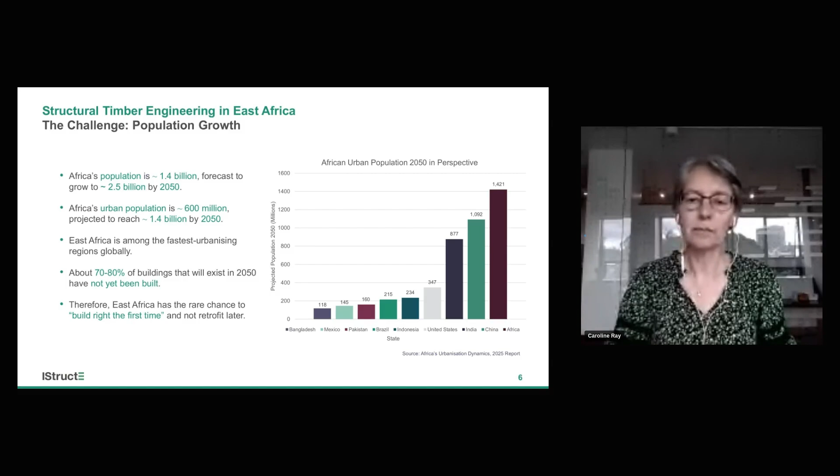We have this incredible need for new buildings, particularly new buildings in the housing sector. There was a study we did a few years ago that was looking at the rate of supply of units in the housing sector at the moment, just in Kenya. And the rate needs to more than treble in order to meet the housing demand. We currently have a deficit of more than 2 million units and require more than 12 million units just in housing within Kenya in the next coming years.

We also, alongside the housing, have need for other social infrastructure, for schools, for healthcare facilities, for basic places to work, for our industrialization that's coming. And so the opportunity that we have is huge.

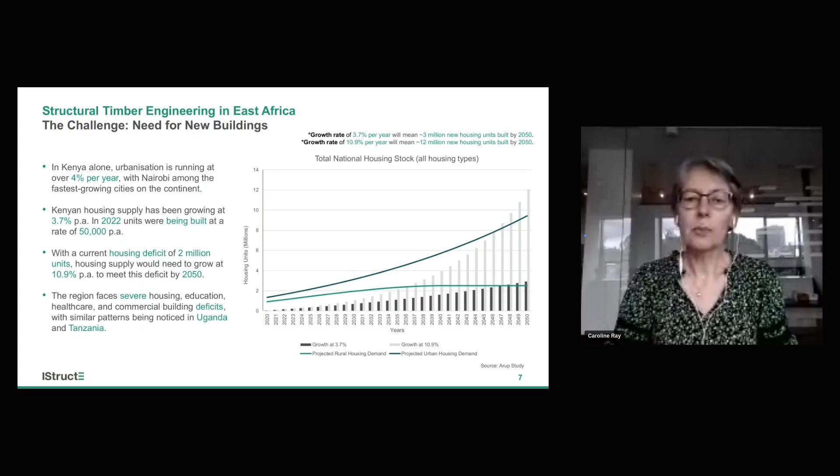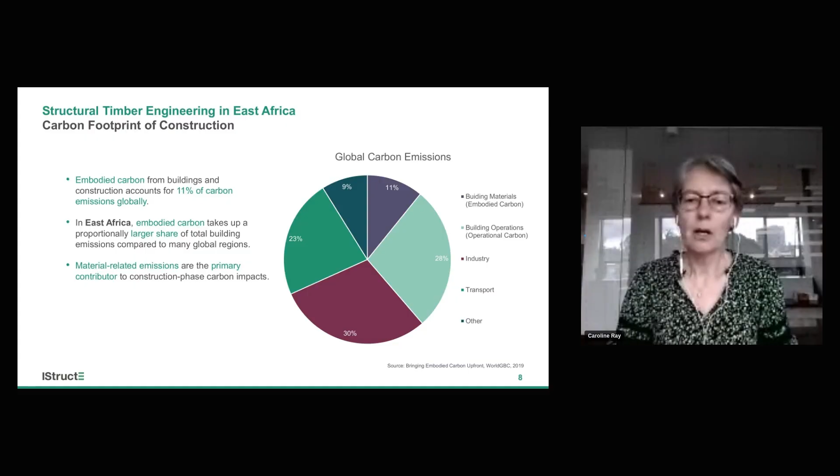We all understand the figures to do with the carbon footprint of construction. Globally, embodied carbon represents about 11% of carbon emissions. But in East Africa, the embodied carbon component of our building's footprint is proportionately higher than it would be in the Global North. We generally don't have heating in our buildings, and in many climates we can cope with natural ventilation, so our operational carbon footprint is proportionally less than our embodied carbon footprint.

This means our material choices for all new construction are fundamental to the overall carbon footprint of our built environment. In Kenya, that disproportionate amount of carbon from our construction sector is very visible—it's currently about a third of our overall emissions. We have a very green energy grid, which helps in other sectors, but it means our embodied carbon, and how we manufacture and process materials and bring them to site, is a disproportionately larger part of our national carbon footprint.

That creates a massive opportunity for us as structural engineers to look at how to do things differently.

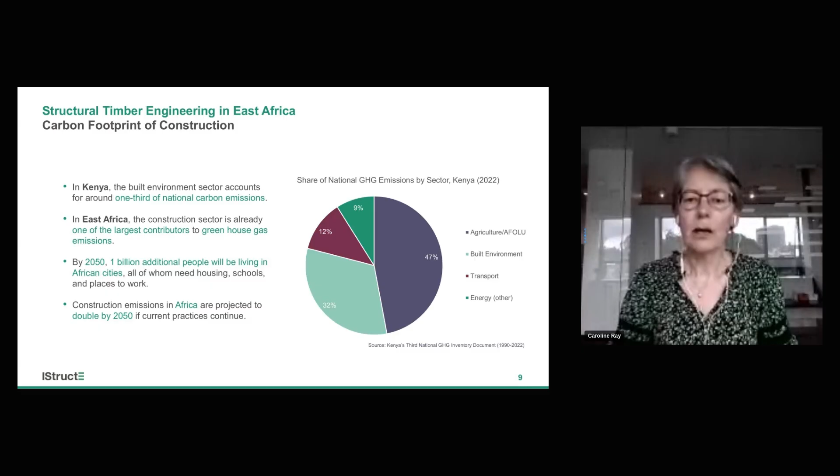So realistically, is timber an alternative? Are they realistic alternatives? Well, we think they are, but we need to look at the tensions in this transition away from the traditional materials, through the modern materials, and into bio-based construction being used in a more technical way, perhaps for higher-rise, denser urban developments.

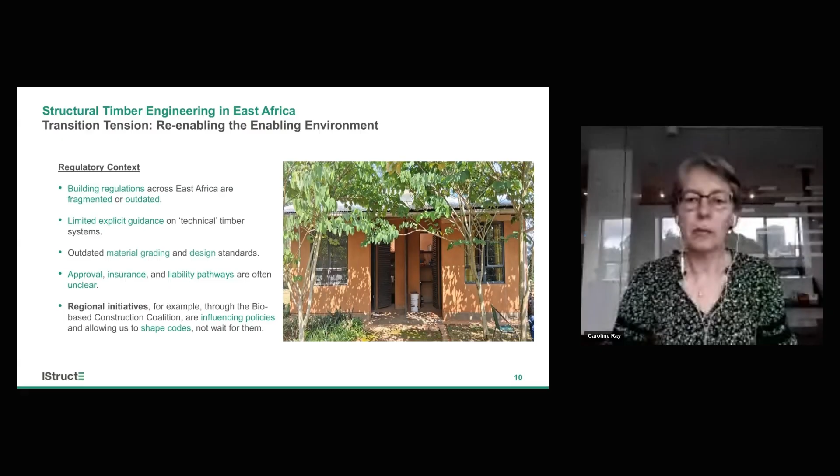Building regulations across East Africa are fragmented or outdated. Material grading and design standards are quite outdated. And we don't necessarily have clear guidelines on how to use technical timber, as opposed to traditional timber that was used in a very basic form.

We also have a gap in our education to do with modern or technical timber. Engineering education is currently all to do with steel, concrete, and those more 'modern' construction materials. But timber has just dropped out of our education syllabus completely—our universities simply do not teach it. That means our designers and also our approving authorities are just not familiar with how to use technical timber in a way that is fit for the future.

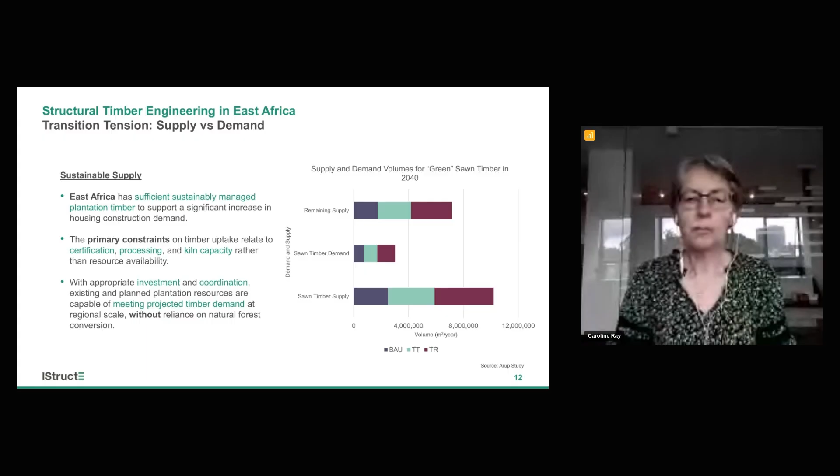Another question our speakers will address is to do with material characteristics. Is it durable? What about termites? What about fire resistance? What about perceptions? Because isn't using timber going back in time? Our grandfathers used to live in timber houses—surely we want something more modern. How do we overcome these perceptions that timber is not a suitable material for our modern construction?

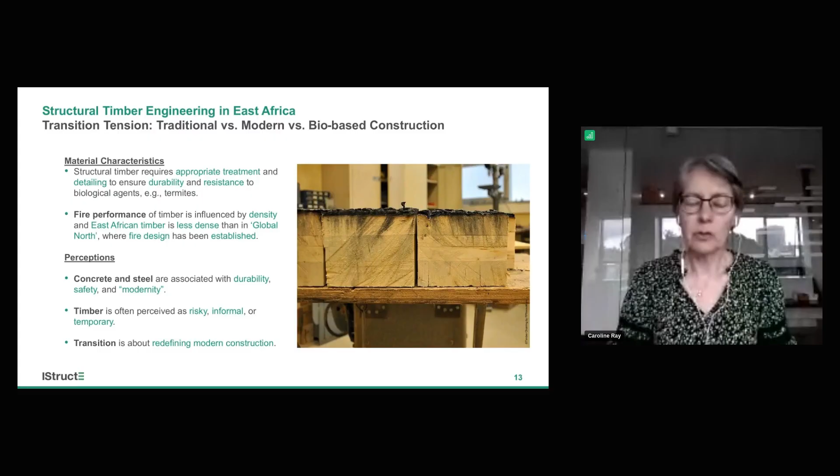Well, our speakers are going to address some of these questions and show how we're already working to solve some of these challenges and improve adoption in the sector in the coming years.

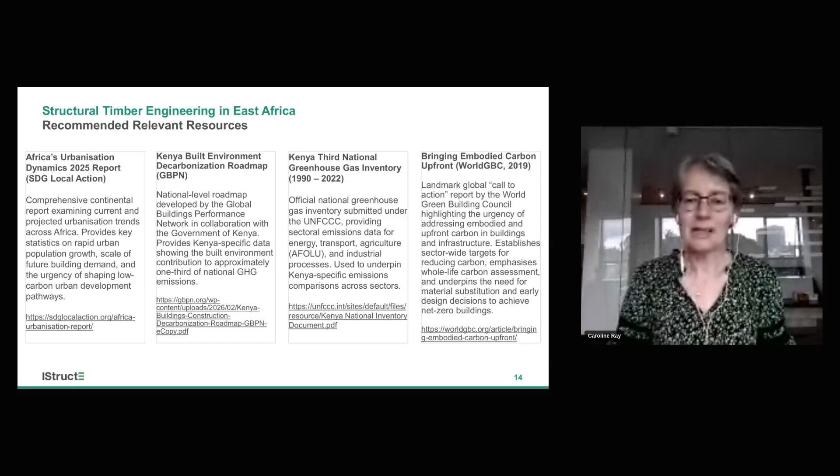Thank you, Caroline. Once again, I'm Edson, a structural engineer at LocalWorks, and I'm talking about timber treatment for durability. Most of the rationale for using timber, I think Caroline has really captured it quite well—there's nothing really more I can add.

Just to say that East Africa is estimated to be lacking about 200,000 additional classrooms, and the number is growing. This statistic is from a few years ago, not even from today. Uganda alone is estimated to be lacking about 80,000 more classrooms, and UNICEF has stated that about 1.6 million school-going children are actually not going to school.

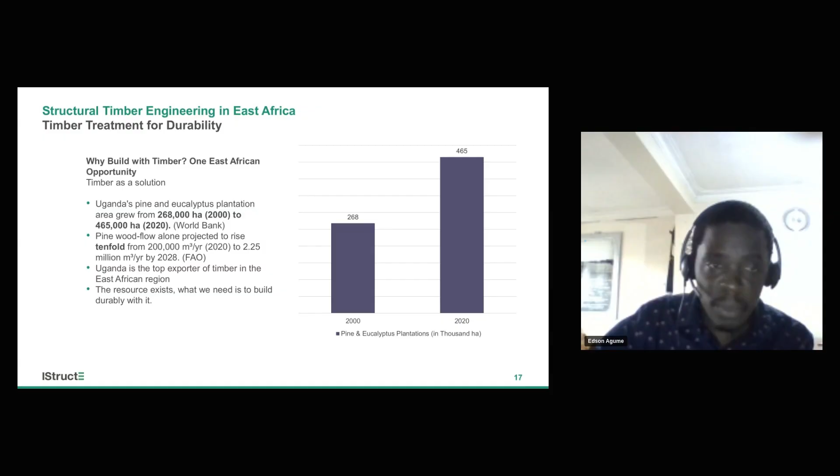So the problem is overwhelming, and Caroline has already stated how the resources are available, literally overflowing—I'm not going to add anything to it. So our solution has basically been: is there a way we can build faster? Is there a way we can build better? Is there a way we can build more sustainably?

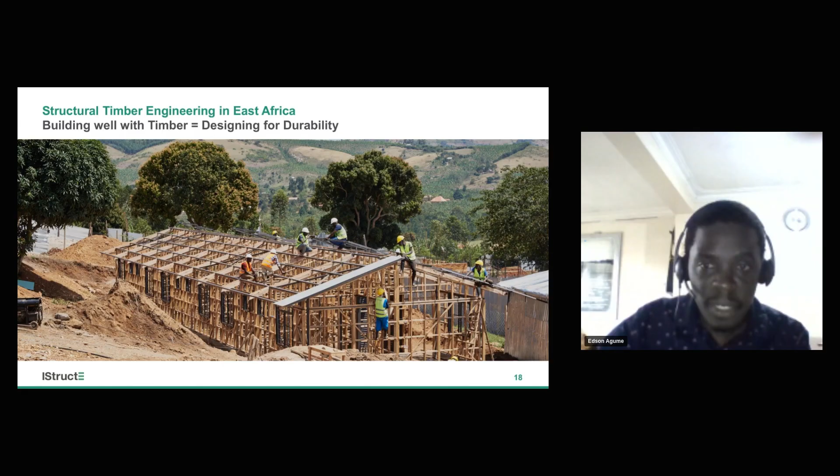Our answer has basically been to use prefabricated timber-framed systems for building classrooms and associated infrastructure around schools. We call this product EcoPrefab.

But there's of course a lot of problems associated with timber. As you know, timber as a bio-based material is subject to attack from insects and also from fungus, which basically causes rotting, which really compromises the buildings that we build with timber.

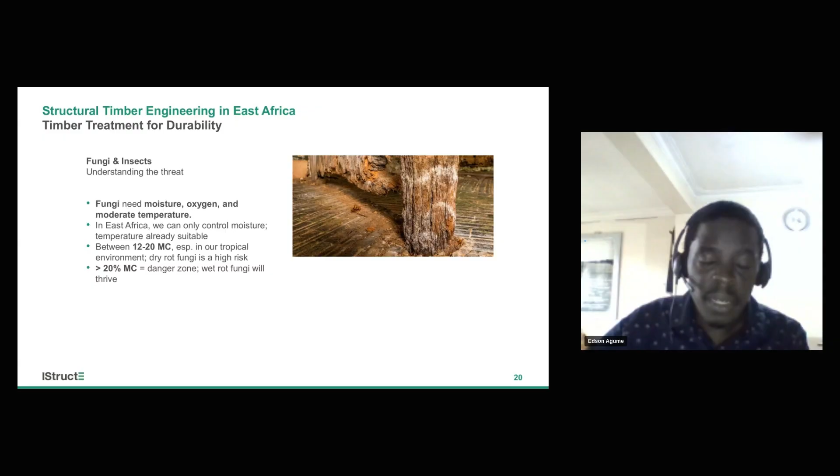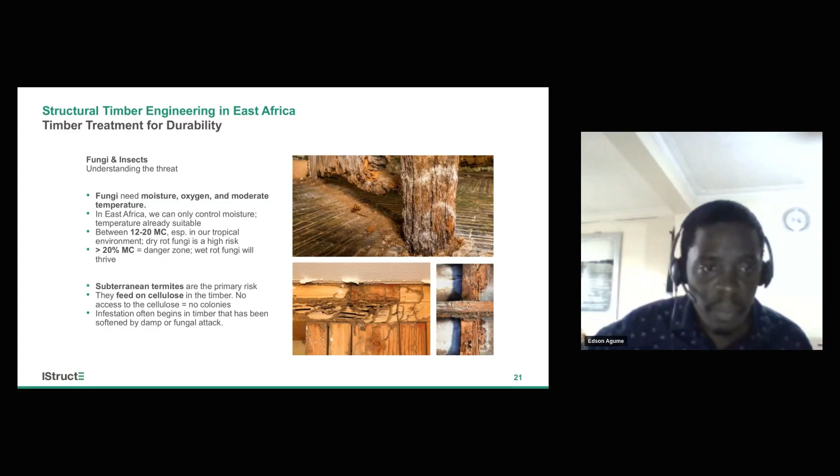A bit brief on how this works: basically rotting will happen even at very low moisture. The specifications show that we build at 12% moisture content. But as you may know, here in Kampala our relative humidity is normally between 60 to 80%, which means the timber moisture content restabilizes to about 16%, making it susceptible to dry rot. Basically, between 12 to 20%, you'll have dry rot happening.

Above 20%, you actually have normal wet rotting that is quite rapid. So our solution to combating this problem is chemical preservation.

Using boron salts, but also dealing with the building envelope, the detailing, to make sure we control the moisture in this timber so that it doesn't get damaged. Just to re-emphasize, even when the timber has been treated, if it is going to be subjected to moisture, especially wetting, that treatment will easily leach out.

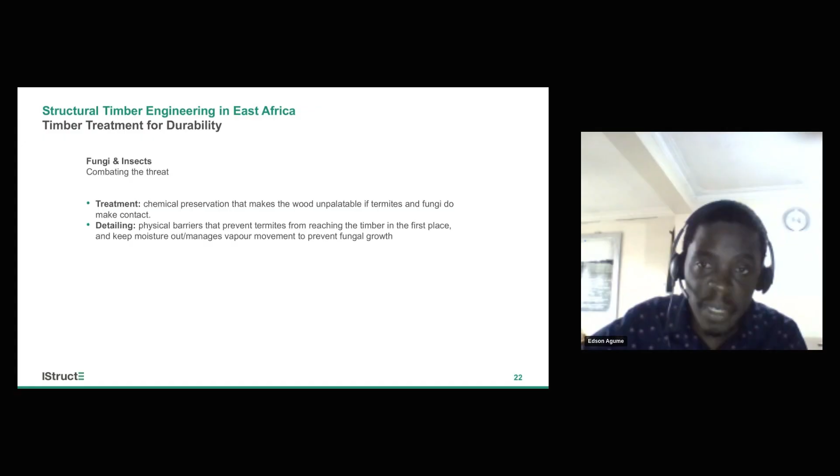So, like I've already said, we're using boron salts, basically a combination of borax and boric acid, forming this DOT, disodium octaborate tetrahydrate, which releases the boron into the timber cells.

The reason we basically think boron is a good alternative is because, for starters, it's not very toxic. It's actually comparable to table salt in toxicity, and yet it's very, very effective when it comes especially to managing rotting, the fungi. Also very effective in managing termites.

But are there other alternatives? Of course, there are many other alternatives, especially most of them which are copper-based, which are quite toxic. So that's why we try to avoid them.

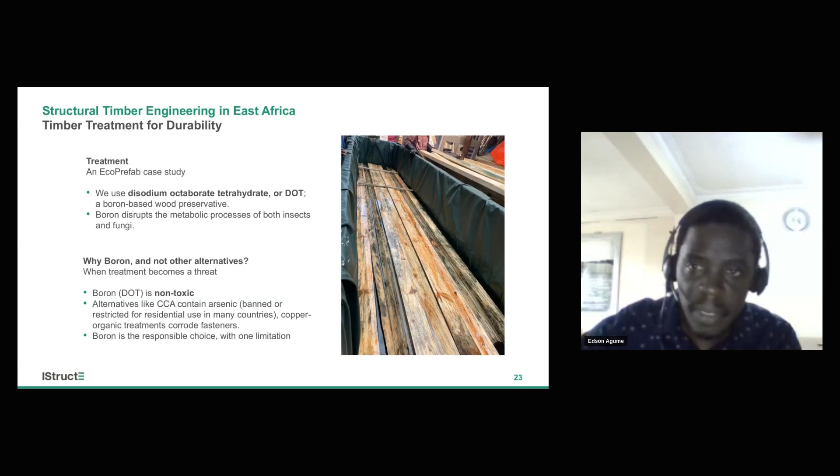But boron has a bit of limitations because it actually does not fix itself in the timber. It's a bit mobile, which is a good thing because its mobility helps ensure it's actually effective, even when the full thickness or piece of timber has not been saturated with these salts. Even with some moisture, these salts are able to migrate and become effective. However, this also means the ease of leaching out of these salts is quite high.

But most importantly, it kind of creates this breathable envelope or finish, which protects this timber from wetting, from humidity or rain or anything from the outside, but also allows it to easily expel this moisture if there's any entrapped moisture in the timber.

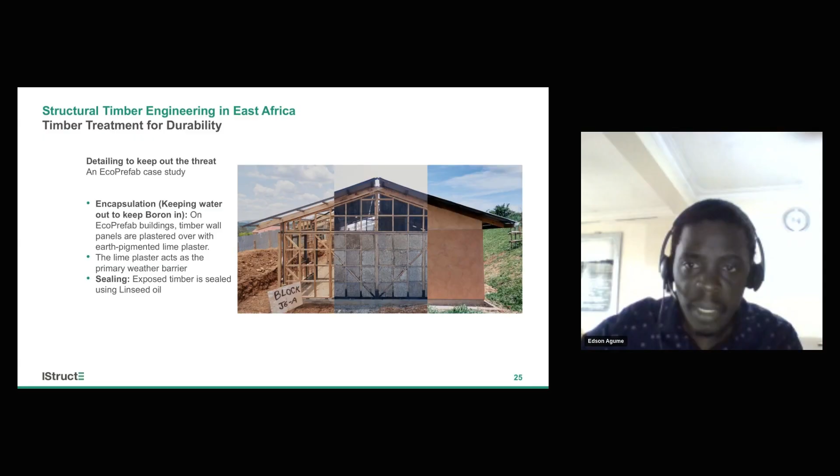We are also trying to make sure we avoid as much moisture from the ground. So we get this timber off the ground with a concrete plinth and with a folded galvanized plate, which is kind of folded in a C profile, so that the timber sole plate can also easily breathe rather than sitting on one continuous moisture barrier.

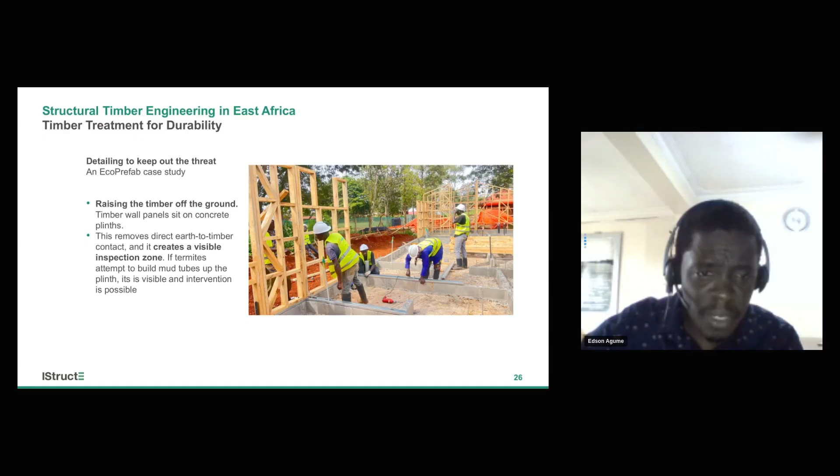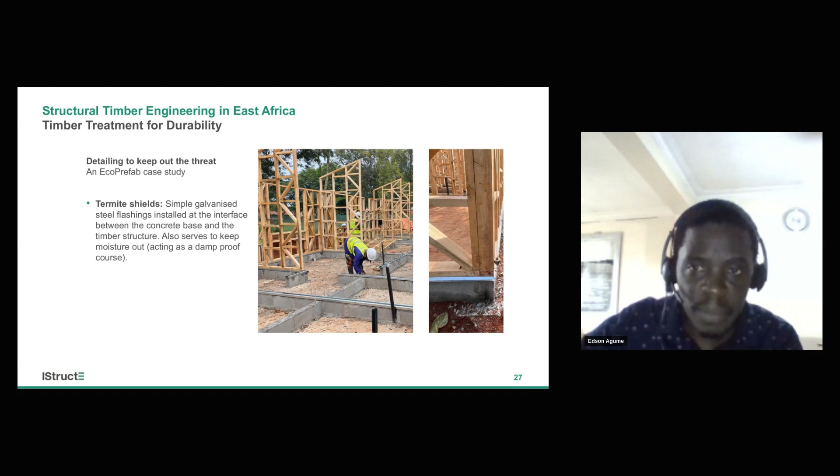The timber at the bottom, towards the outside, we're also trying to use this steel sole plate to ensure we stop insects, especially termites, from physically climbing up. It's very difficult to see on the image, but it's kind of a leap over of about 40 millimeters that is quite good in controlling actual access of the termites into the building.

We also are trying to build with reasonable roof overhangs, so that we avoid actual direct wetting from the rain, which should also keep the buildings quite dry.

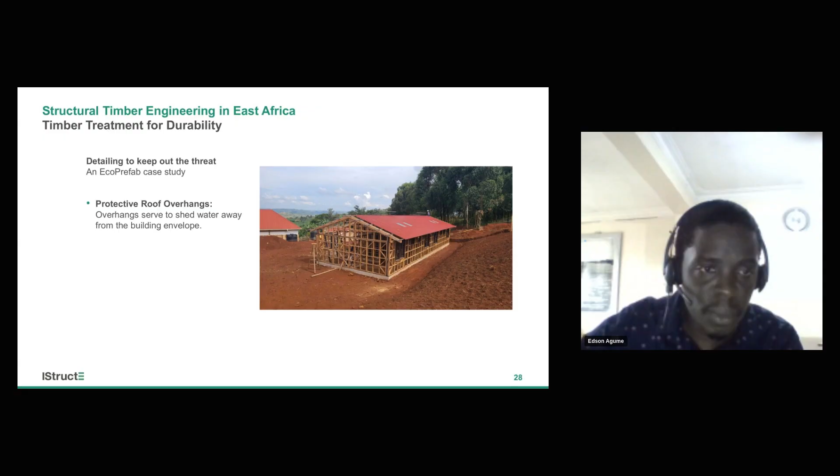Just to recap, timber durability is actually a design outcome. It's not an inherent material weakness. I think we can actually use timber reliably and reasonably if we treat it well and detail well.

Boron from DOT is a non-toxic treatment choice, which is effective, safe, and aligned with green construction methods. Then again, sealing and encapsulation will ensure we keep this treatment from leaching out. And like Caroline had said, East Africa really has a very, very big timber resource that needs to be used. I'm going to hand over to Zani to continue with the presentation. Thank you for listening.

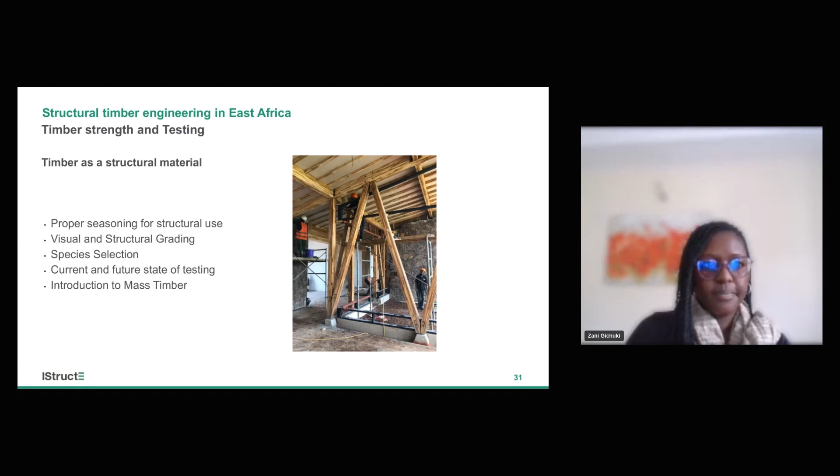Timber is anisotropic, so it's significantly stronger along the grain than across it. It has a good strength to weight ratio, with some mass timber buildings being quoted as a fifth of the weight of typical reinforced concrete construction. It's also a pleasing material to look at.

However, moisture, as was previously mentioned, and defects affect timber performance, which is why timber has to be well seasoned and graded.

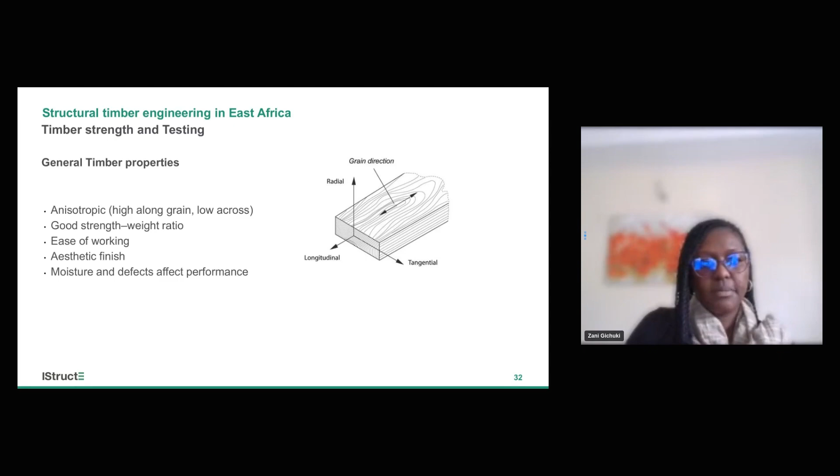Seasoning is basically the drying of the timber, and it can be done with kilns or by air drying. Most structural applications will require the timber to have a moisture content of 12%, as moisture can reduce the strength and stiffness properties of the timber. But the use of the structure and other factors will also determine what your optimum moisture content will be.

For example, in the Eurocode, Service Class 1 is for enclosed structures such as offices and schools. Service Class 2 is for partially exposed structures, and Service Class 3 is for fully exposed structures such as bridges, which could allow you to go up to a 20% moisture content.

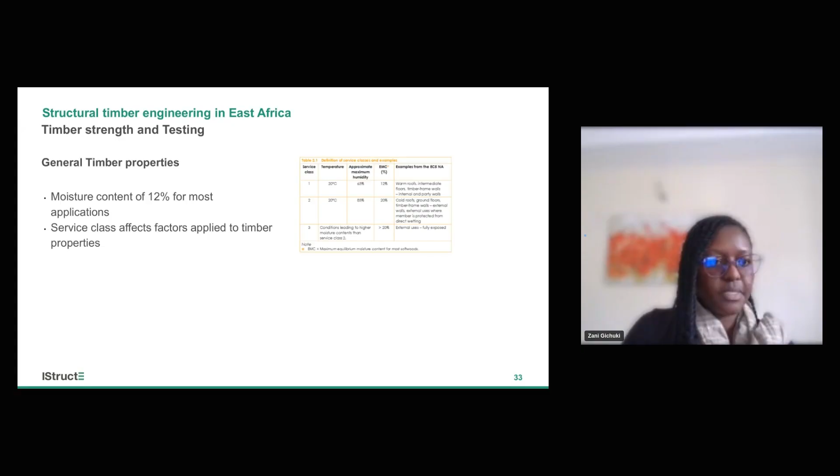Visual grading, which would be the next step before you use the timber, is sorting the timber according to its physical characteristics that are known to lower its strength. In Kenya, we use a Kenyan standard for grading softwoods, which is based on the British standards.

Sorry about that. Yes, that's based on the British standards, and we use the British standard for the visual grading of hardwoods. So the largest predictors of strength would be the number, size, and location of knots, and the slope of grain.

Knots are areas where the branches grew from the tree, causing points of weakness, and you don't want them at critical points of the beam, like in the middle or at extreme fibers. But the really small ones can be ignored, and all those rules are in the grading rule book.

The slope of grain is just the direction of the grain in relation to the length of the timber. So the straighter the grain is, the better the timber will be, because it's strong along the grain.

Other defects such as decay caused by rot or insect boring, fissures in the timber, and wane and want, which are dimensional tolerance issues, are also measured. And then based on that, they're assigned a grade.

For softwoods, there are two grades: the general structural grade and the special structural grade. The general structural grade is suitable for applications that have low to moderate loading, while the special structural grades are for high load bearing scenarios. For the tropical hardwoods, there's only one grade, the tropical hardwood grade.

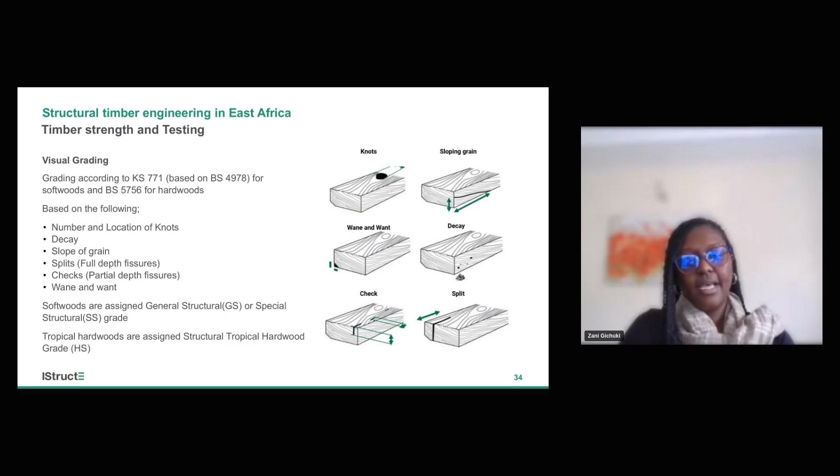Everything else would be marked as a fail. So the visual grading is very important in selecting good timber, but for efficient engineering design, you would need to have structural grading.

Timber is structurally graded according to, in the Eurocode, based on the bending strength of the timber. Other codes, like the Australian one, rely on the tensile strength, but since in East Africa we're following the Eurocodes, that's also how we're going to name our timber here.

Softwoods and hardwoods are graded differently. Softwoods always start with the letter C, which stands for coniferous, and hardwoods start with the letter D, which stands for deciduous. So, for example, if I were to say a C24 timber, I mean it's a softwood with a bending strength of 24 newtons per millimeter squared.

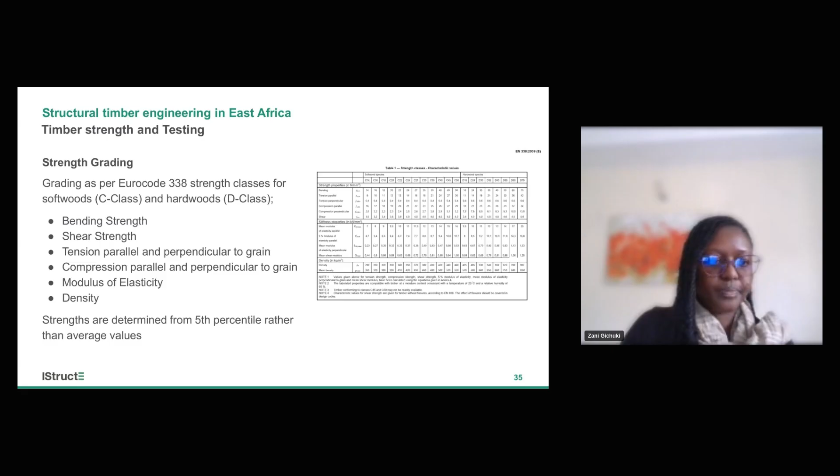The rest of the properties are taken from the table in the Eurocode, but these correlations have been made based on testing timber in Europe. There may be different correlations for timber grown in East Africa because it grows much faster than it does in Europe. So we will now look at some common species used in the region.

Most of the structural timber in East Africa comes from plantations. There are large plantations of pine, cypress, and eucalyptus, which provide a large volume supply that natural forests would never be able to sustain. In the list I'm going to discuss today, the only indigenous species is Melia. The rest are exotic, but widely grown in the region.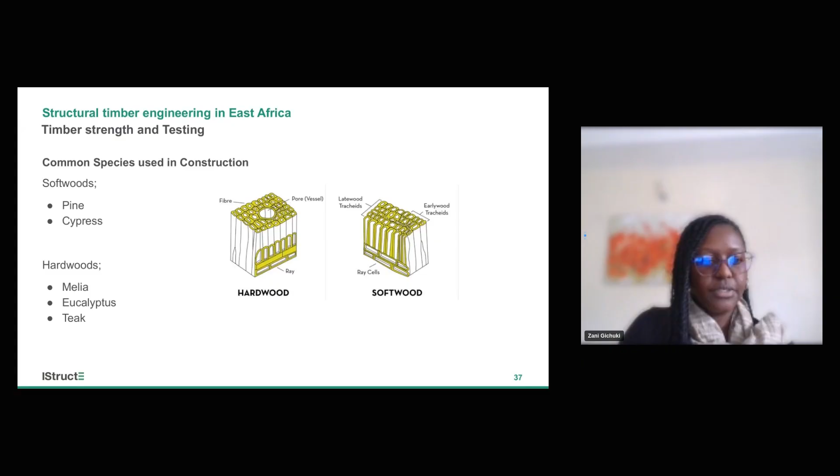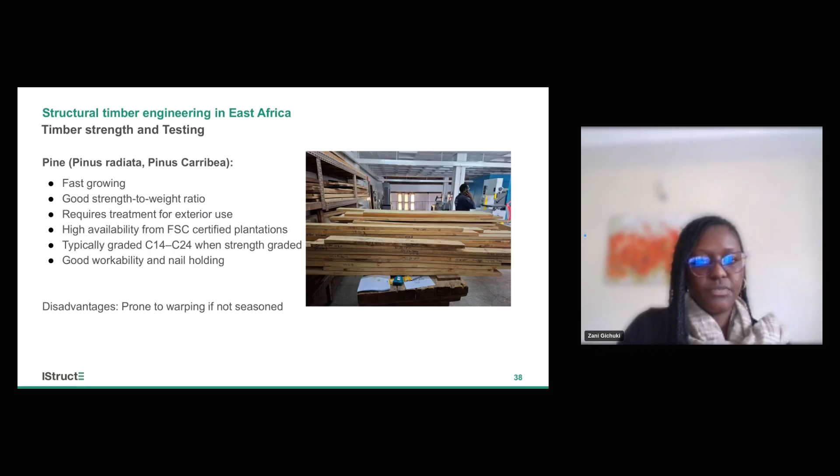We'll start with pine. There are a couple of different species of pine in the region, and it's well liked because it's fast growing and has a good strength to weight ratio. There's high availability from FSC certified plantations, meaning it's sustainably grown and sourced. From the different tests done on it, it can typically be anywhere between C14 and C24. It has good workability and nail holding, and requires treatment for exterior use. The main disadvantage, which is common to timber in general, is it's prone to warping if not seasoned properly.

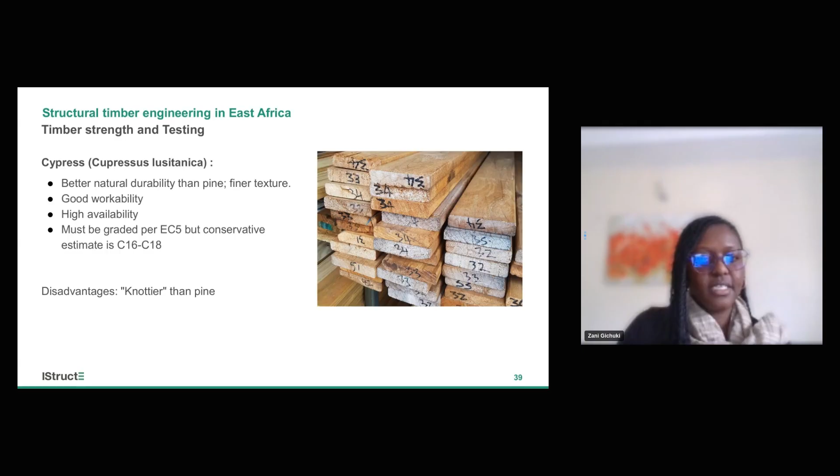Then we have cypress, which is widely available in Kenya. It has better natural durability than pine and good workability. The high availability is mostly just in Kenya. It has not really been graded to Eurocode standards, but for engineering purposes, locally, most people assume it's between C16 and C18. It does grow more knots than pine.

Then for the hardwoods, we have eucalyptus, of which there are a number of species. It's also well liked because it's fast growing and dense, and quite widely available. For hardwoods, one of the main things to consider while doing your connections is that you'd have to pre-drill the holes, because attempting to drill them directly would cause the timber to split. Eucalyptus is known for splitting, but this can be mitigated if the seasoning is done well.

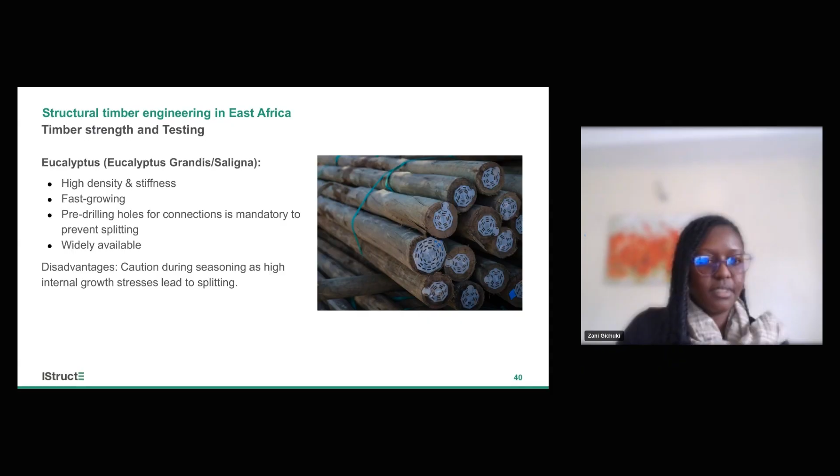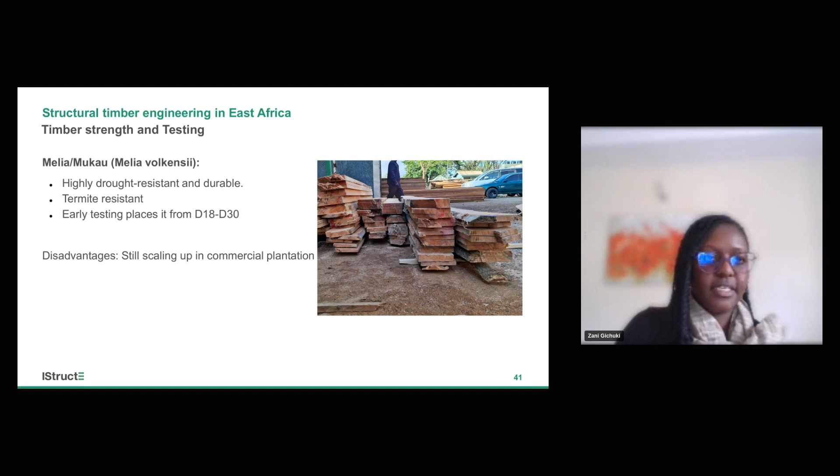Then we have Melia, the only indigenous species on the list. It's highly drought resistant and durable, and grows in arid and semi-arid areas. It's termite resistant, and early testing we've done, though on a very small sample size, shows it's between D18 and D30. The disadvantage is it's still scaling up in commercial plantation.

And the last one is teak, also a hardwood, with high natural resistance to termites and rot, and high durability. It's aesthetically pleasing, but also quite expensive and slow growing, and you would have to replace your tool parts quite quickly—that would be your saws and drill bits.

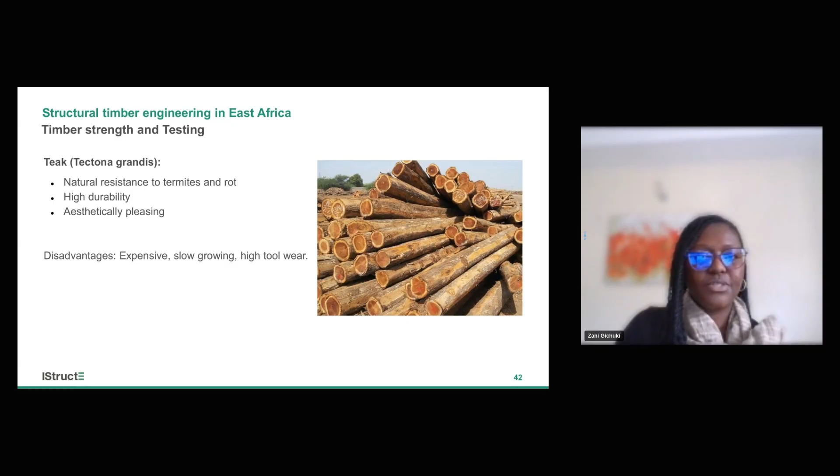Next, we will speak about testing. To use Eurocode 5 confidently, engineers would need defined strength classes. While there's a lot of testing ongoing at research institutions, it's largely currently driven on a project basis. Individual companies or engineers are testing their own timber, leading to very small and fragmented data sets.

A lot of testing in the region also involves retrofitting old machines that are actually meant for concrete and stone, which could lead to errors in reading results—but that's the current state of testing. When it comes to visual grading, most timber suppliers do not grade their timber unless you request them to. All of this lack of data could lead us to over-engineer our designs, which is wasteful.

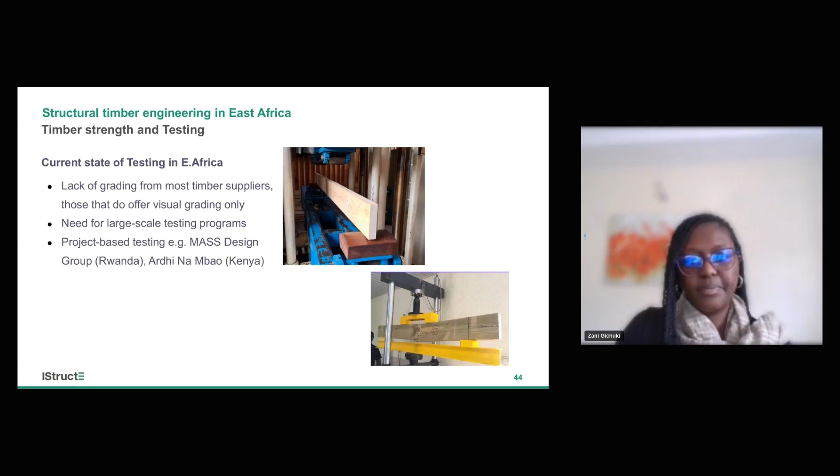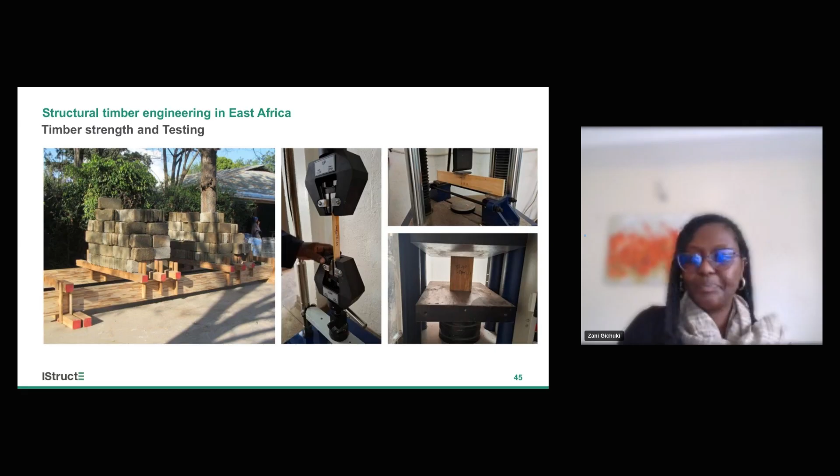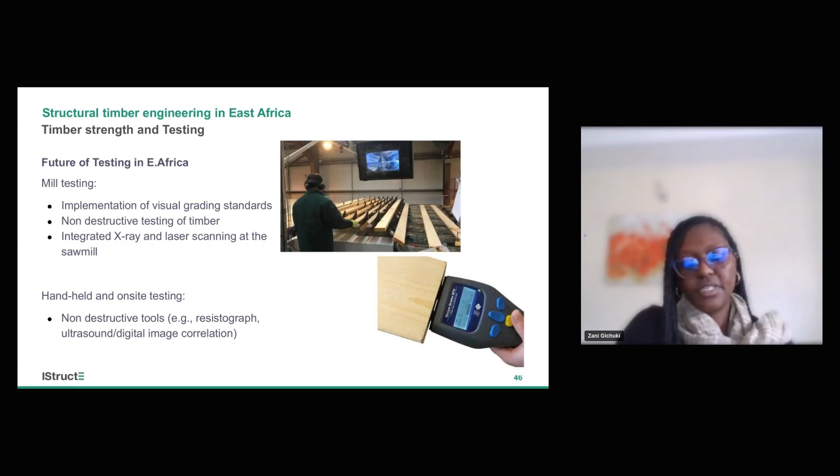On site, there are also handheld tools that can be used, but the caveat for all this is that the machines must still be calibrated with lab testing. So the future can only exist if we have large-scale testing.

A brief introduction to mass timber.

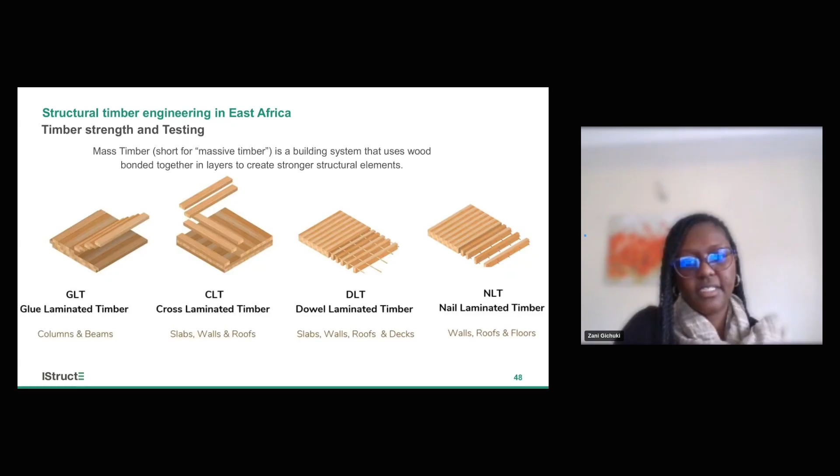For those who are not aware, mass timber is a building system that uses wood bonded together in layers to create strong structural elements. We have glue laminated timber, used in beams and columns where all the grains face the same direction. Cross-laminated timber has grains in perpendicular directions, giving strength in 2 directions, mostly for slabs, walls, and roofs. Dowel and nail laminated timber is similar to glue lam, except instead of glue, they use dowels and nails.

Some examples in the region of mass timber that's been locally made: in the case of Mass Design Group, teak glue lam. Mass Design Group designed, fabricated, and installed their own glue lam columns and beams. And us at Ardhi Na Mbao are in the process of prototyping and have made our own CLT and glue lam.

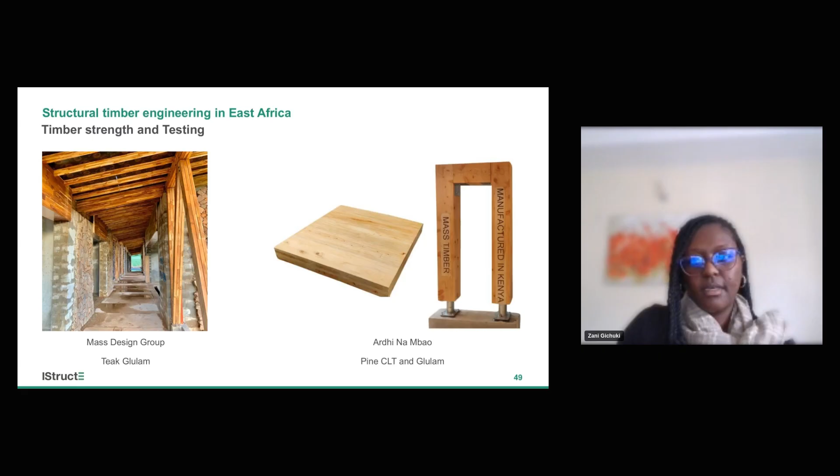So in summary, you should know your material, specify the right species based on strength, availability, and use, and design for the material, accounting for the specific behavior of the wood, such as if it's hardwood, pre-drilling and treating your softwoods. Specify quality, use properly seasoned graded timber and good workmanship to ensure structural integrity, and build for the future. Timber is not just a structural material, it's our opportunity for sustainable low carbon development.

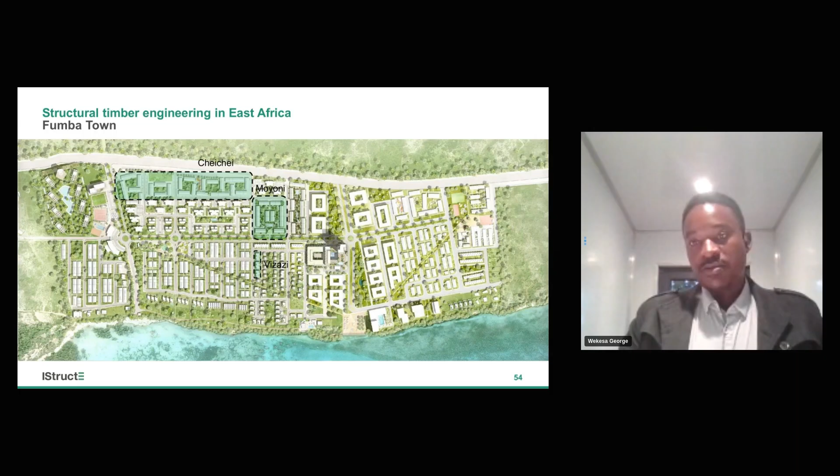So an overview of the timber systems. When we started back in 2013, we basically just learned by doing. We didn't have as much timber knowledge in how we designed and implemented our projects, and it turns out that surprisingly, we were more cost effective and resource efficient with limited knowledge, as opposed to when we started acquiring more knowledge and wanted to use more timber in the buildings, which actually ended up being value engineered out.

So as an overview, most of the structures within that master plan have a conventional ground floor, and the stories above it are made out of timber. This is partly for reasons the previous speakers highlighted, to do with protecting the timber from weather, but also we are accommodating different programs in some of the typologies, where we have retail spaces on the ground floor in some mixed-use typologies, and timber for the residential typologies on top.

Over the years, we've gone through some iterations of the different timber systems. This has mainly been driven by trying as much as possible to integrate local timber, and also optimizing resource use—not using timber everywhere, but thinking strategically about where it's more efficient to use it. For example, we realized the most effective way to use cross-laminated timber is within the flooring system as opposed to the walling systems. So most walling systems have been updated, and we're now more or less using a timber frame system similar to the one the first speaker talked about for the classrooms.

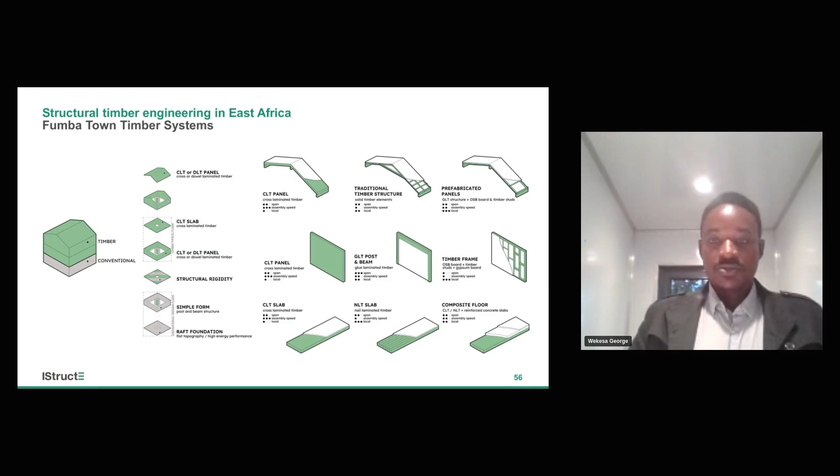The first project we did, the Moyoni Homes, was the first CLT building in Zanzibar. This was one of the buildings we did without much knowledge on timber, and surprisingly, we ended up being on cost with the developer, and also got a lot of market traction. Even in terms of environmental standards, last year we won the Built by Nature prize and got shortlisted among the most sustainable buildings in Africa.

So the system comprises timber frame walls, which on the outside have cement fiber, and on the inside an OSB board. These systems are prefabricated offsite and just assembled as panels on site, then finished off with a wood fiber infill for insulation, and then gypsum.

The flooring system is a hybrid composite system with a CLT floor. This is also one of the iterations we did earlier when we were using South African timber, which is less dense, so its structural performance is slightly not as strong as some of the timber we got from other places like Europe later on.

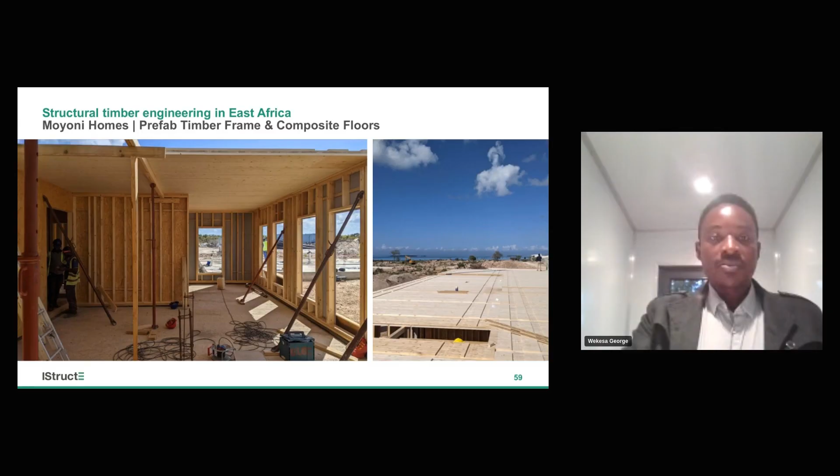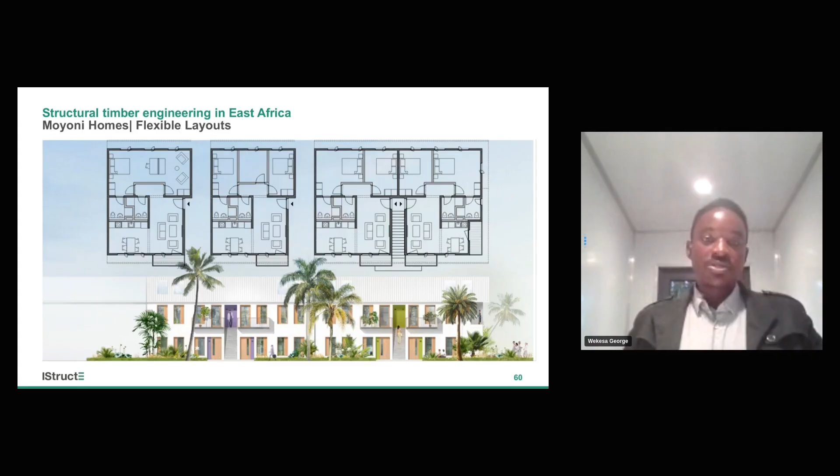In how we laid out this building, we made it very flexible so that only a few walls were structural within the apartment, allowing different layouts to be achieved so clients could customize the apartment to their liking. We also strategically positioned the wet walls, the walls with the bathroom and kitchen, against each other, so we limit the number of walls that need waterproofing.

Also, since we were designing this building in Zanzibar, we positioned openings strategically so that we could have opportunities for cross ventilation. We also added shutters on the outside, and in some cases on the inside, where you can close off and limit the heat gain in the building when it's not being occupied.

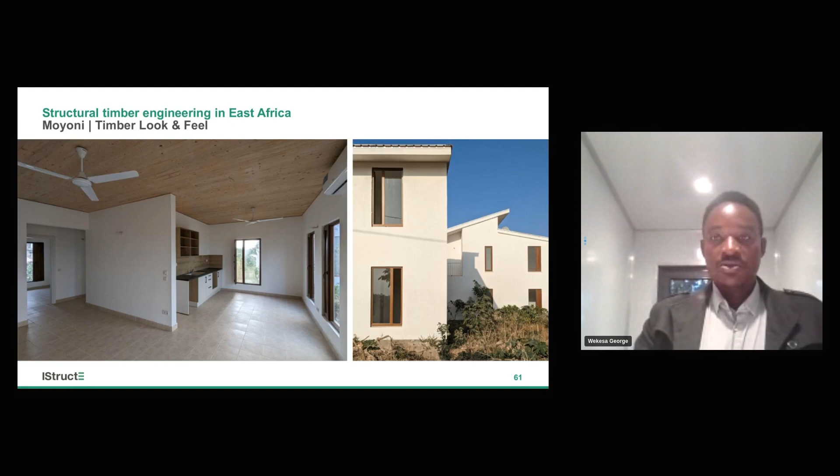The second building is the Vizazi Houses, which we designed as a multi-generational home. Building on the flexibility of the previous units, we made it so this unit could be customized in different layouts, so that as the family grows and evolves, the use of the apartment could change. It's a 3-story apartment, a growth from the previous one, which was 2 stories.

We made the bathroom units, highlighted in green, as prefabricated elements offsite, which were then just assembled on site. This actually made the speed of construction really fast, while also reducing waste on site.

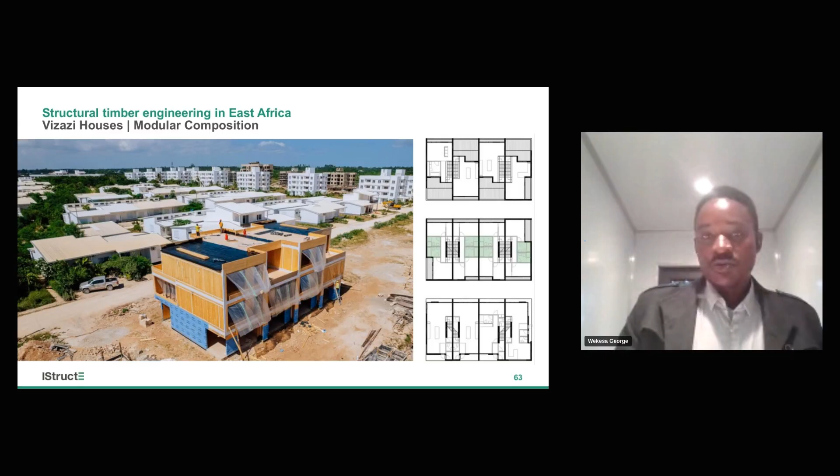For this building, the client had started to learn more about timber, and we ourselves also started to learn more about timber. So they became more ambitious in trying to use timber everywhere, wanting a full CLT building, which we quickly realized was not a good decision. First, because of cost increases, but also using CLT everywhere requires a lot of volume of timber, which can be wasted if not used efficiently.

So in the next iteration of that building, we changed some of the CLT elements, especially for the walls, into timber frame walls. We only limited the CLT to the floors and some signature architectural elements, such as the staircases within the apartment. This resulted in almost a third of the costs being reduced from the building, making it even more viable.

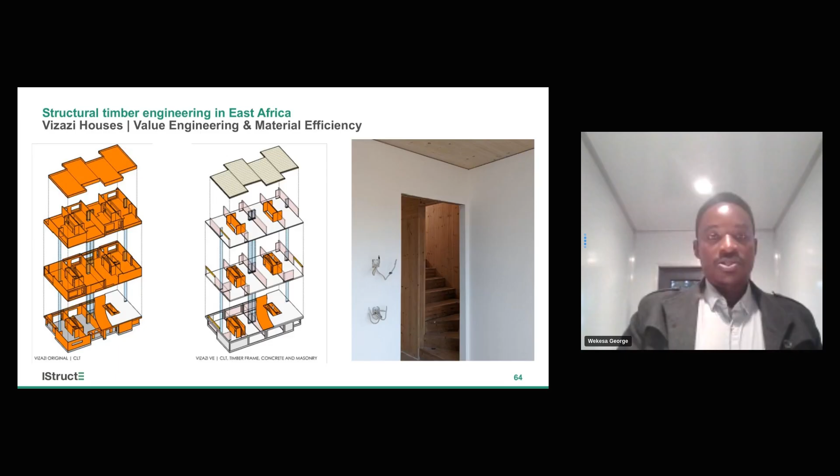That's a view of the first apartment, which we did in full CLT. We still retained this signature staircase, which we quite liked as a design outcome. That's also something really appealing to buyers when they visit the apartment.

That's the look of the building from the exterior, the first building that we did. It was built very fast compared to some of the other ones at the back here that were built with masonry and concrete, which took significant time to finish even after we had already plastered and moved on to the next typology. It shows how fast we can build with timber, and it really saves a lot on the developer's side.

The success of those two projects, which were on the higher end of the market, allowed us to build confidence in the social acceptance of the material as being aspirational enough to use in affordable housing. The fact that we could demonstrate people willing to spend more in higher end markets showed that this isn't just a cheap material used only in affordable housing settings. That built a lot of confidence in pursuing affordable housing design.

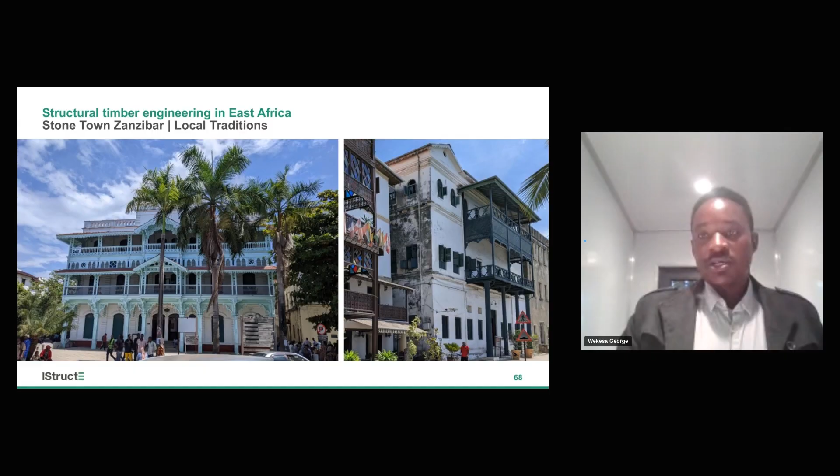We also took this opportunity to infuse some local traditions within Zanzibar. Timber is a material that has been used traditionally within Zanzibar's Stone Town, and it's something we wanted to celebrate as a way of connecting modern interpretations of the material to what had been done in the past. So we borrowed some elements in how we express the portico spaces on the exterior of the building, quite similar to the traditional architecture.

This is a 4-story typology, a progression in density from the previous one, which was 3 stories. In this project, we also did some value engineering exercises to make it viable for the market. One was reducing the CLT walls and using timber frame walls instead. Another was switching from a composite CLT slab, CLT with reinforced concrete, to a CLT slab with just a concrete topping to increase the mass.

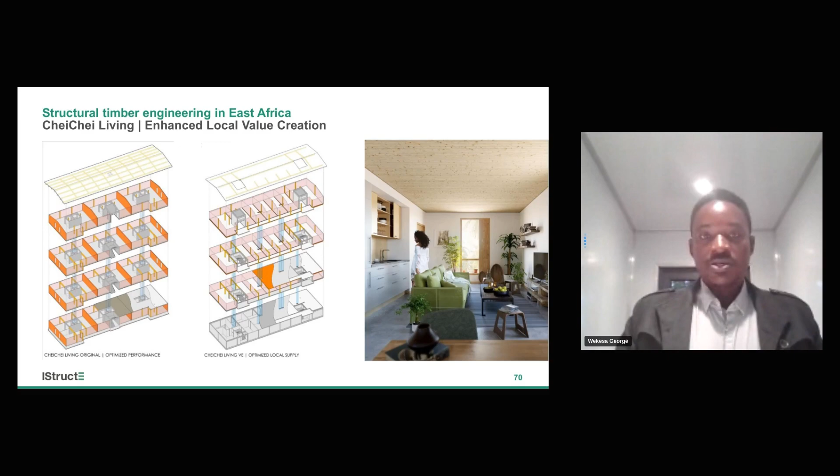This was made possible because we also switched timber suppliers. Initially we were using South African timber, which is less dense, and in terms of structural performance it required a reinforcement layer on top of the concrete to make it viable. With the European spruce we used instead, it was easier to implement a timber system that doesn't need as much concrete.

All these structures were made in compliance with international fire and life safety regulations, combining both Swiss and British standards for sizing the building. For example, the length of this building is actually at the limit of the maximum travel distance allowed. Fire compartmentalization was done accordingly—the red marking shows the 60-minute fire rating walls, while the inside partitions had a lesser rating since we made them flexible partition systems.

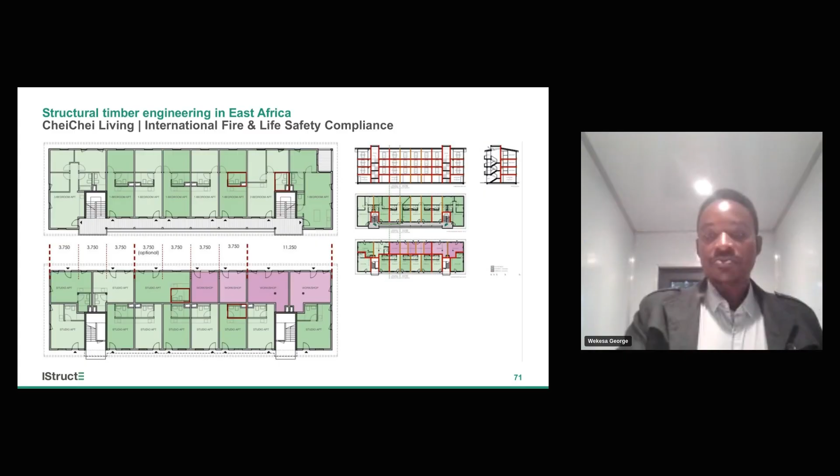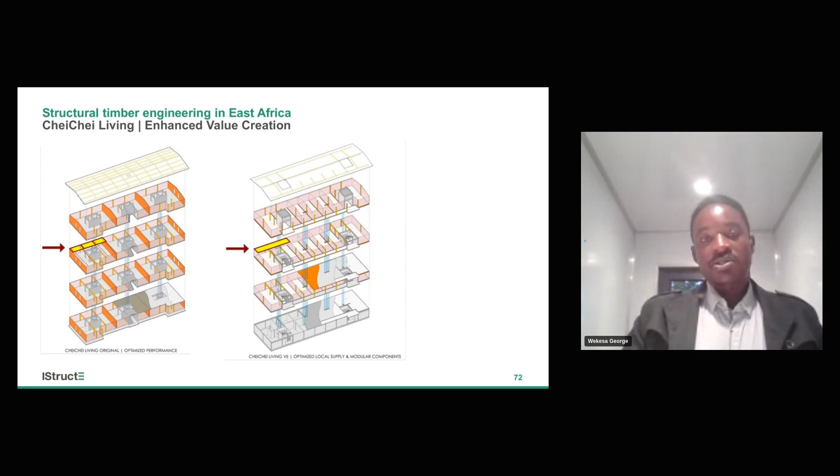Another value addition we made was switching from smaller CLT members into a more unified member, which allowed for easier transport and assembly logistics on site.

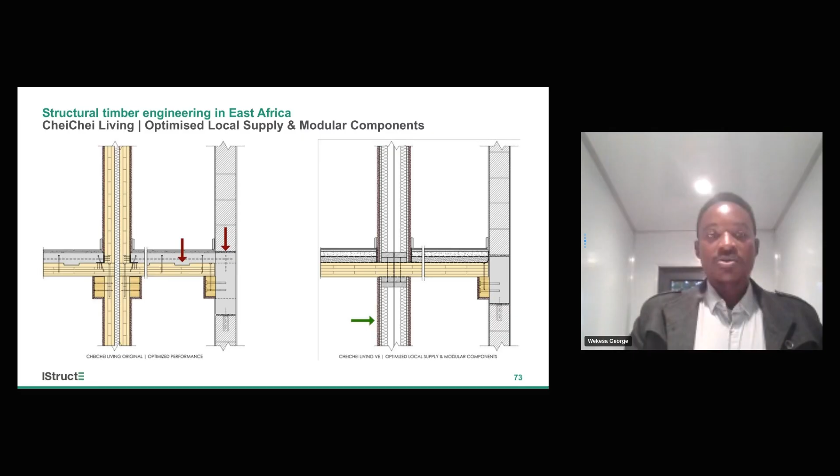In terms of detailing, we also simplified over time from CLT walls to timber frame walls. Initially, when using less dense wood, we needed to increase the charring depth by adding additional members at the corners, as shown in the detail on the left, making it bulkier. But when we used more durable wood, shown on the right, we were able to simplify these details and no longer needed the reinforced concrete layer on top.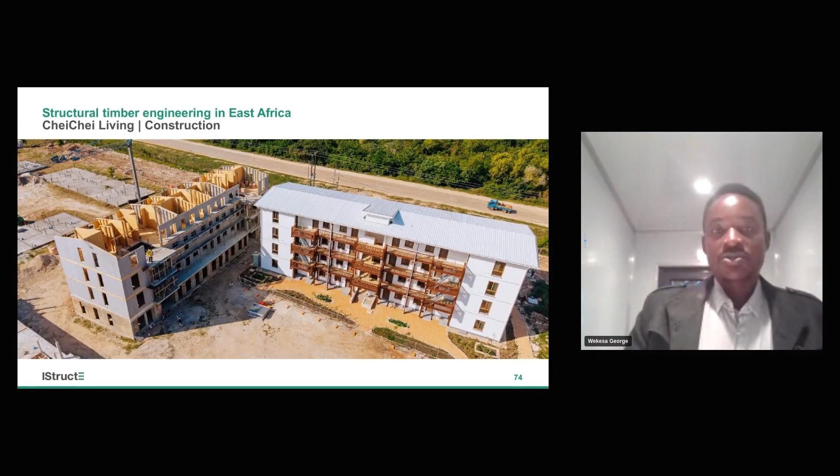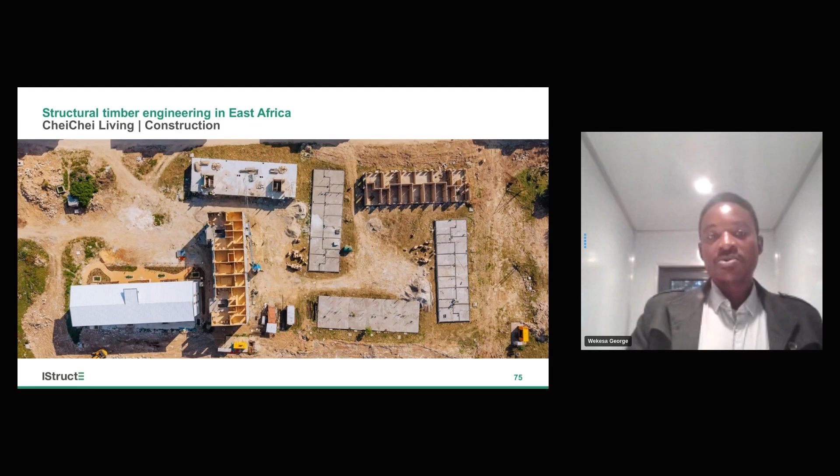So the construction was quite fast. The three levels above the conventional built floor below were actually done in one week, which is quite impressive. That's the finished building on the right. You can also see how clean the construction site is, with minimal waste—not very typical of most construction sites we see here in East Africa.

In conclusion, we tried as much as possible to incorporate locally sourced wood, though we still had to import some wood elements to make the projects viable. Our goal is to use these systems to show that this can work in East Africa, starting with simple applications of locally sourced wood while we gear up for a market more related to manufacturing and locally sourced timber.

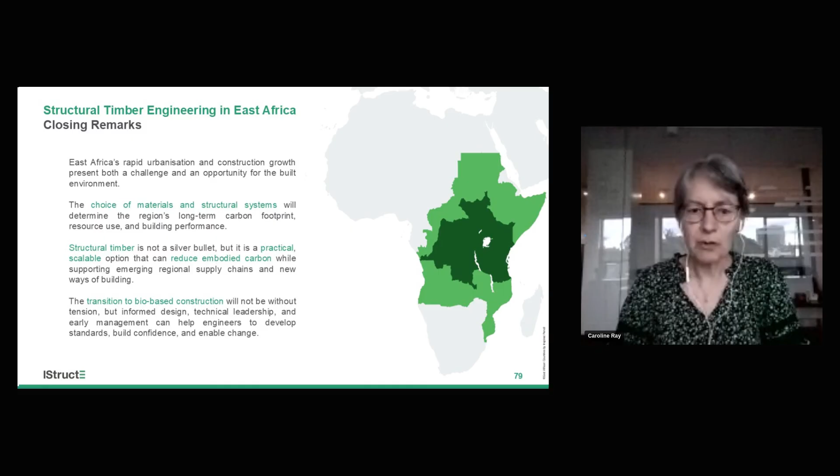I hope that you have seen that we don't have an option of doing nothing. Sometimes when we talk about the built environment, decarbonisation, and being involved in climate action, we say we just shouldn't build anything, we should build as little as possible. For us in Africa, that's not an option. We have more than 1 billion more people who are going to need housing, basic services, and infrastructure. So build nothing, do nothing is not an option. We have to do things differently.

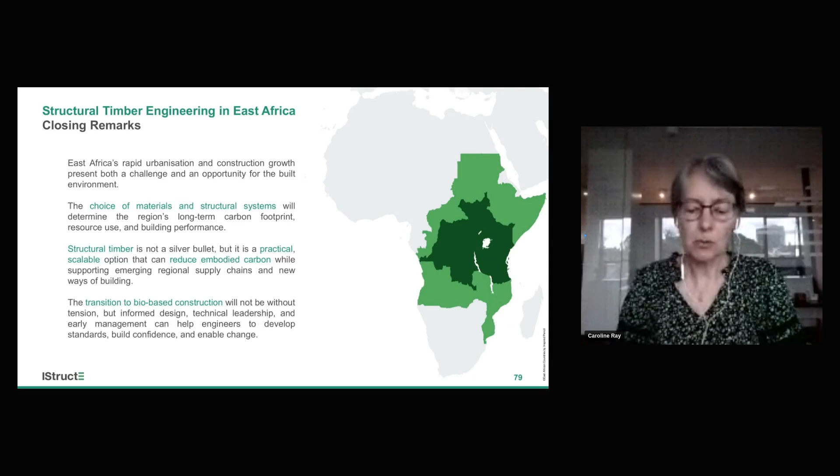I hope that you have seen as well, through our presentations, that those of us working in the East Africa region are already doing whatever we can in order to enhance the role and support the inclusion of structural timber as a bio-based construction material within our region. We're very much working as a collective, supporting our governments, bringing in technical expertise where we can, and making sure that we, as structural engineers within the region, are doing whatever we can in respect of this and climate action.